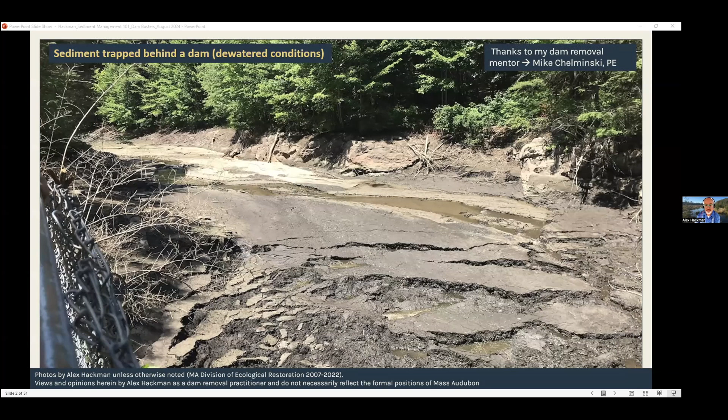So there is indeed baby poop behind dams, and it is hard to manage, but there's also this. I want to emphasize that this is also impounded sediment, fuel for the food web, habitat building substrate. How we manage that during a dam removal project affects the success of what we're really trying to do here, which is ecological restoration.

It's the process of assisting the recovery of a damaged, degraded, or destroyed ecosystem. And if you haven't read the International Principles and Standards of SER, I strongly encourage you to do that.

Our rivers, make no mistake, are degraded. Damage is an acute short-term impact. Degraded is a severe long-term impact. And that's the situation with our rivers. Thousands of dams, hundreds of years, severely degraded.

So we need to tailor our responses to the nature of the impact. To me, assisting in recovery really means three things. The first is taking a process-based approach, trying to take actions that repair the engine of nature, let nature take care of itself. The second is focusing on connectivity, taking actions that allow energy, materials, and organisms to move freely around the landscape. That's really key to how the engine of nature functions.

And lastly, engaging people for their wisdom and long-term care. In this day and age, I particularly want to call out partnering with local tribes to draw upon ancient wisdom as we seek better ways of caring for our land moving forward.

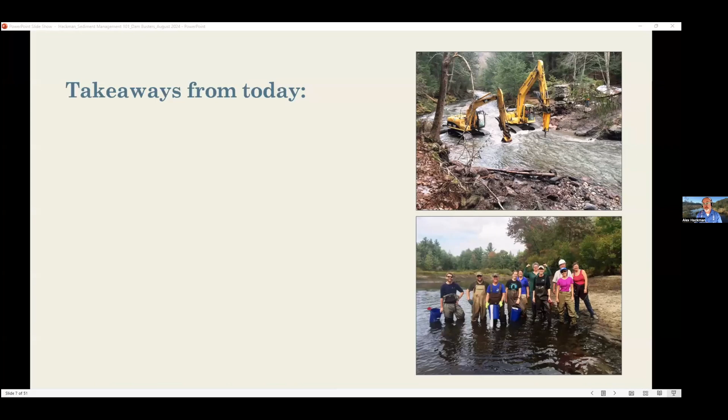But today we're going to talk about sediment and dam removals. So I have four takeaways for you. First is remove dams to restore rivers, which you already know. Number two, keep sediment in rivers whenever possible to do even more restoration. Number three, only use costly dredging and disposal when you identify significant risks. And fourth, evaluate local conditions to decide.

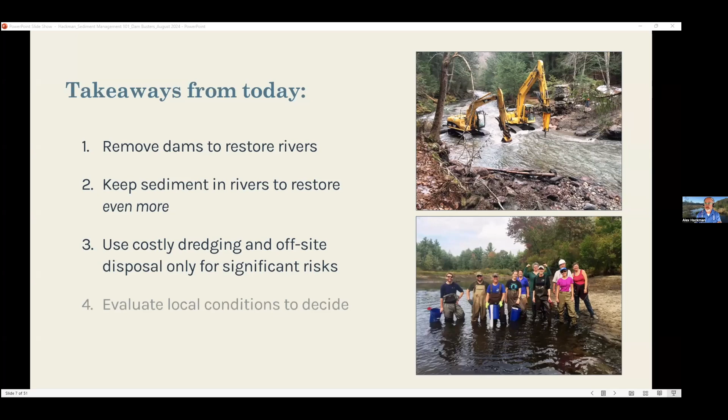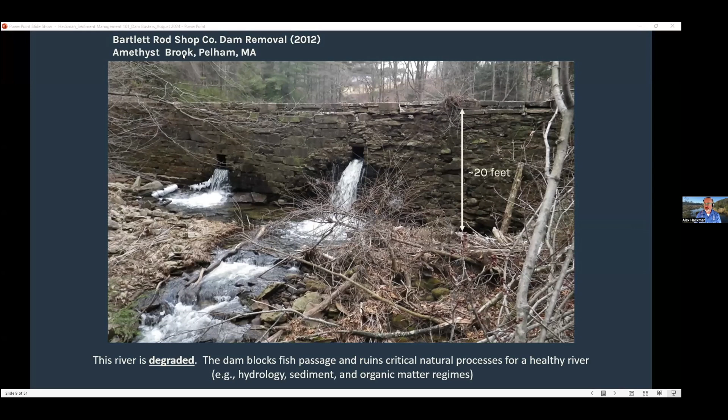So let's talk about the first one, remove dams to restore rivers. Let's talk about what a dam removal project looks like. This is a project I got to work on at Amethyst Brook in Pelham. This is a 20-foot tall dam. As you're all aware, this dam obviously blocks fish passage, but also those critical processes that keep a river healthy, namely the natural movement of water, sediment, and wood, which is how a river builds habitat on its own. That's looking upstream. Here's looking downstream.

So let's think about this. For 150 years, that 20-foot high structure has trapped all this sediment and wood, all that habitat building material trapped. This is a single point of 3,000 to 5,000 we have around the state, causing severe impairment. I want to note a lot of this talk about sediment management is about how to navigate regulatory systems, how to move preferred alternatives through them. I just want to level set and say this is allowed to happen through our existing regulatory structure.

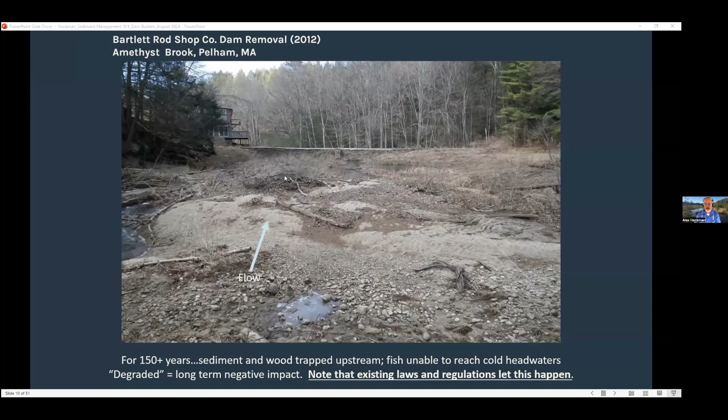Go forward with confidence with what you're doing. You're removing dams and undoing over a century of impacts.

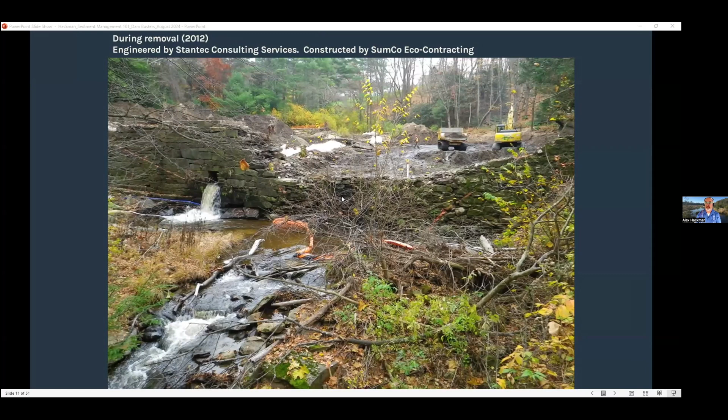This is what removing a structure like this looks like. You divert the water, get in there with large equipment, take it apart in a safe, controlled manner, and you'll have a final product. It looks like this when you're done.

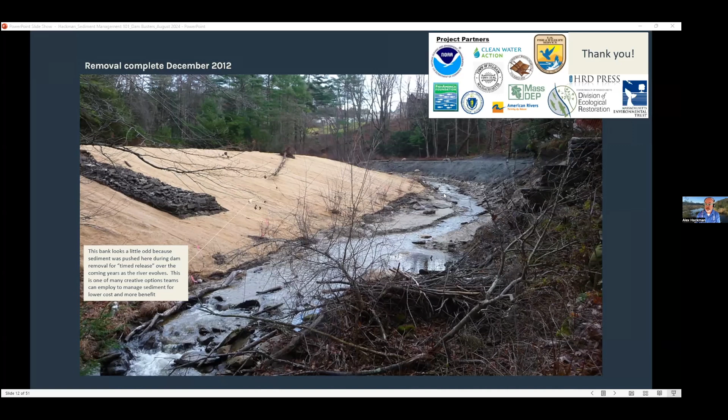This is how our dam removals go these days, right? We have a lot of challenges to remove these structures. And then just 2 years later, it looks like this. Looks like nothing ever happened, you know?

I think you all see this time and time again. You get these benefits, and the findings are documented locally, nationally, internationally. So removing dams restores rivers. Now this is at the dam.

Let's look downstream of the dam. I want to thank dear friend Robin McEwen, one of the consultants on this project, for taking this amazing photo sequence I want to share with you. So we're thinking about sediment.

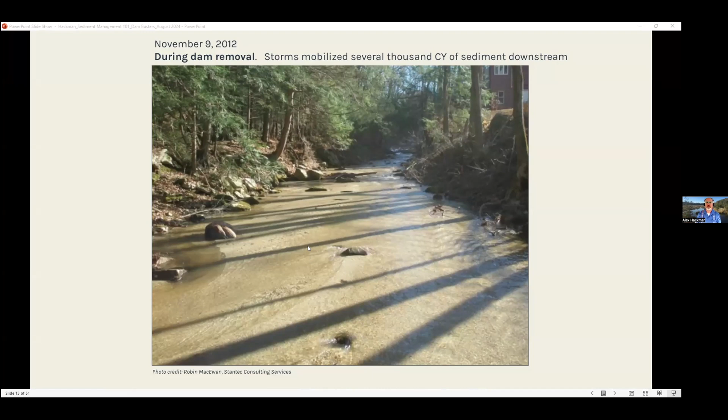But what we were able to observe is a month later transitioning to this. Just a month later, we see new floodplain benches. We see the river sorting that material, washing the fines down, leaving gravel behind. We're starting to aggrade this incised channel. Within a month, the river's converting those short-term impacts to benefits.

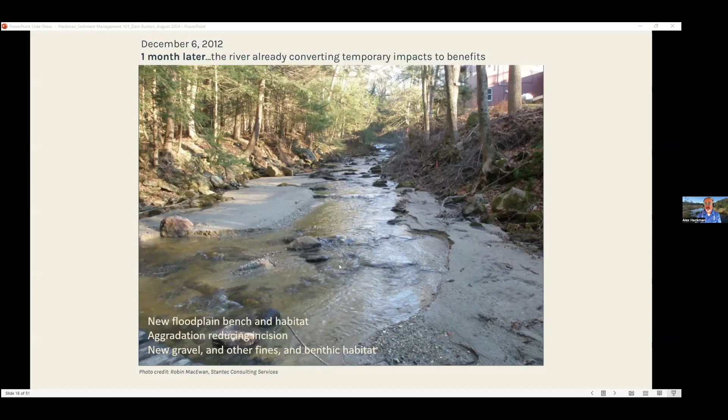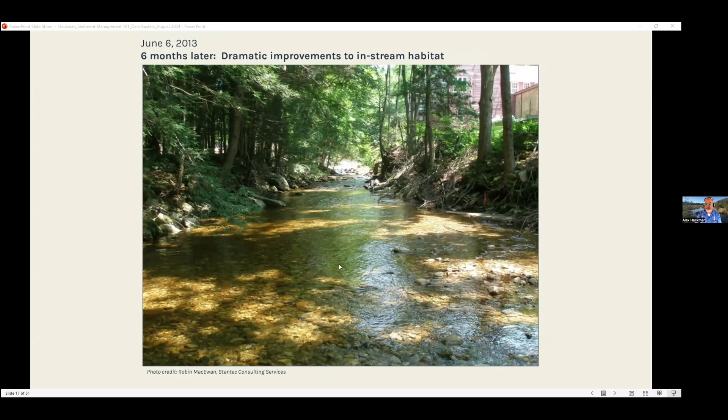Then 6 months later, when the dam removal is done, we have this situation: dramatic improvements to stream habitat, none of that visual impact remaining. This is really a theme of this talk today: you're going to have these short-term impacts doing dam removals, but you're going to yield permanent, well-understood benefits that address what could be a century of degradation.

Moreover, what happened here is allowable and permittable under existing regulations.

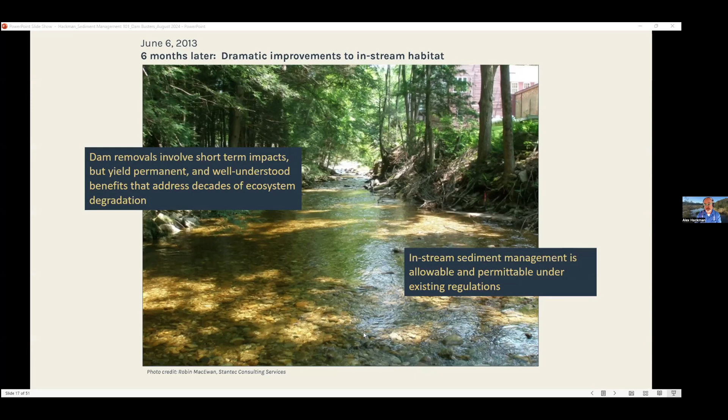That day Robin took this picture, she looked down in the stream and saw this: sea lamprey. This stream had no sea lamprey in it for decades before the dam removal. We know this because there's a sea lamprey scholar who lives in this watershed. So immediately after this dam removal, sea lamprey returned for the first time in decades.

This is how sediment release during dam removal can do more restoration. It can drive downstream habitat restoration as well. Those findings were published in a paper you can download and read at your leisure. So this is one of my big takeaways for you today: releasing what I'm going to call non-risky sediment during dam removals can significantly restore those downstream habitats as well, within months.

I want to pose this question to you: how else could you get these benefits? Let's say we wanted to concoct a project for stream bottom restoration with the purpose of returning sea lamprey to a beautiful stream like this. How would you do that, and how much would it cost? But here, as a side benefit of dam removal, we got that to happen.

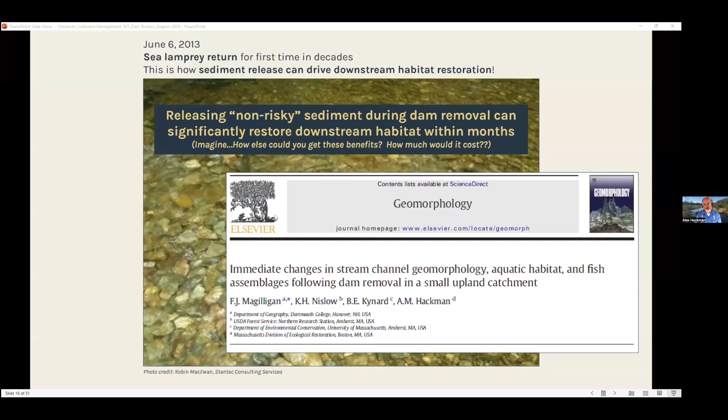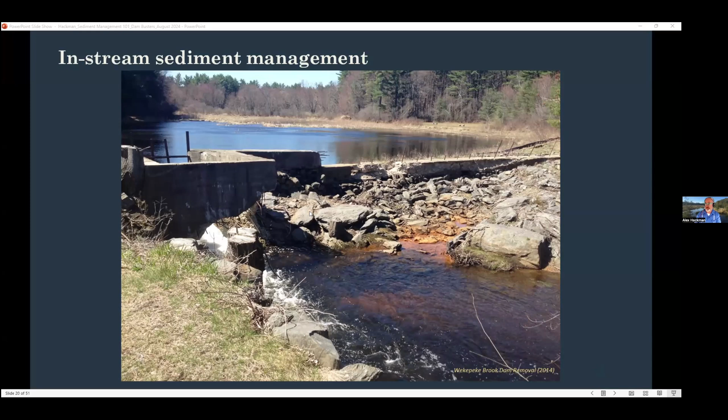So this brings us to point 2: keep sediment in rivers to restore even more. This approach is commonly called in-stream sediment management, downstream release. It's got a variety of terms, but it looks like this. This is what most of our dams in Massachusetts look like, these small structures, right?

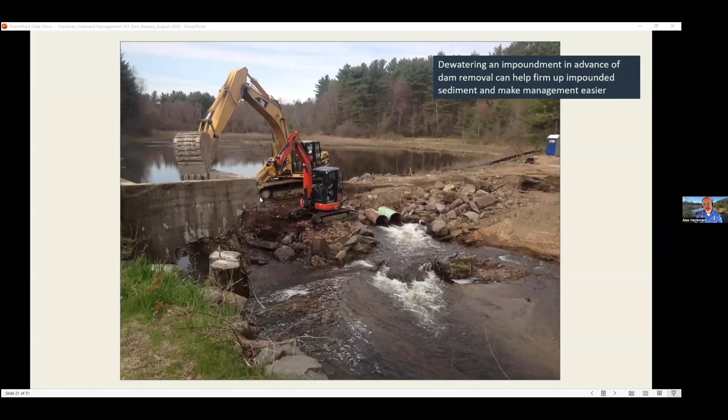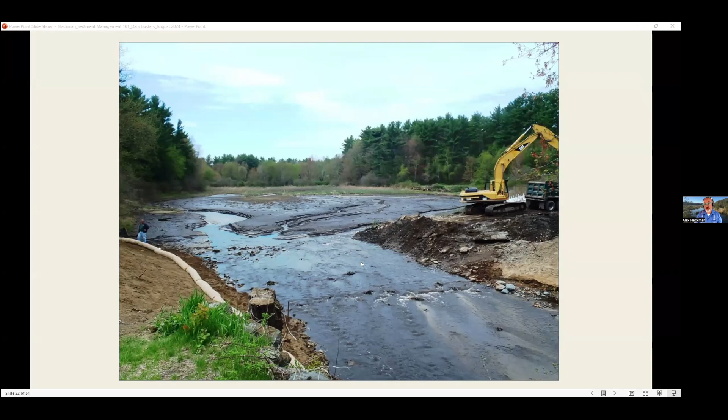So we get in there. If you can dewater the impoundment beforehand, that helps stabilize the sediments a bit. Generally this takes a couple days to a couple weeks. Then in this situation, the river was allowed to reform itself. This is completely passive sediment management. Within 3 months, all of that sediment was stabilized by just the native seed that was in the impoundment.

So for no cost, with downstream benefit, no risk, and vibrant restoration, this approach was successful.

But it's not always that simple. It's not always a situation where there are no risks, there's little sediment. Sometimes you have to be more creative.

I want to share a little bit about a project in Northampton on the Upper Roberts Meadow Brook. This is a huge dam, 40 feet tall, impounding tens of thousands of cubic yards of sediment. And this is a small trout stream. So the initial idea of what to do here was to mechanically dredge the material, truck it to a disposal location that would be created in the woods, and construct the channel through the impoundment.

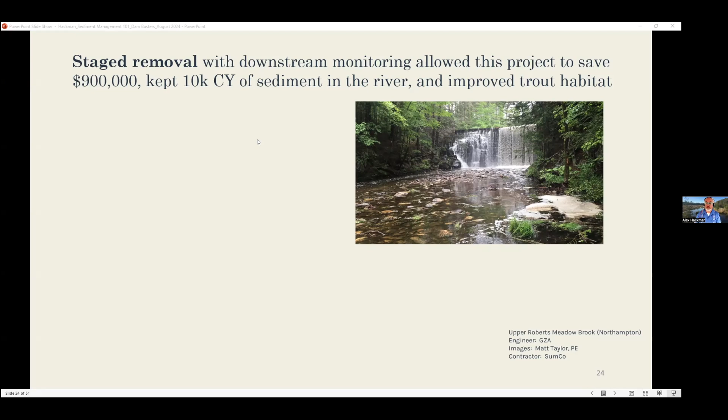When the team expanded and we thought a little bit harder about what could happen here in light of potential downstream habitat restoration benefits, a different idea was developed involving staged removal. I have to give a lot of credit to the engineer here, Matt Taylor, for this. The idea was, yeah, it would be great to release all of this sediment to benefit this trout stream, but there's a lot of it, and this stream is really small. And P.S., there's a downstream flooding risk — there's a road that already floods during storm events.

So what was developed was an approach of removing a little bit at a time. Take the first bit off and do intensive downstream monitoring to trigger the next bit of release. Remove a bunch, remove a bit, look downstream — is everything fine? Okay, remove the next lift. Is everything fine? Remove the next until you got to the end of the dam. In that way, we're able to monitor for risks, do the dam removal a little more slowly, but save almost $1 million of sediment management cost and keep all that material in the stream.

And here's what it looked like. This is why I'm going to argue strongly to all of you: make this your default approach. Make in-stream management your default approach and let your evaluation process try to prove it otherwise.

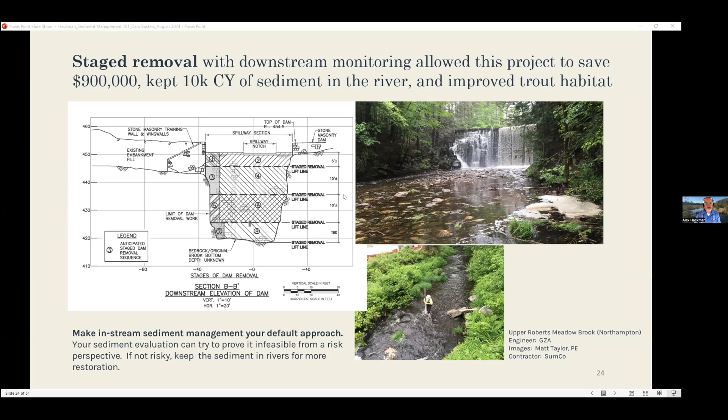This is what it looked like upstream of that 40-foot dam. Moving from picture 1, 2, 3, 4, you can see this is just gradual channel evolution. This is no channel construction. This is just go ahead, river, take the sediment and form yourself.

Some folks will look at those stream banks and say that doesn't look good, that you should get in there and stabilize that, or it just doesn't look right. Well, from my perspective, this looks great. You just have to have a perspective of giving nature time to heal. There's no need to do anything else here. Let nature find its equilibrium, let it continue to drop that material into the stream for more restoration, as we're talking about. And if you do need to stabilize this, generally it's going to be to protect infrastructure. That's an important part of your sediment evaluation that we're going to keep talking about.

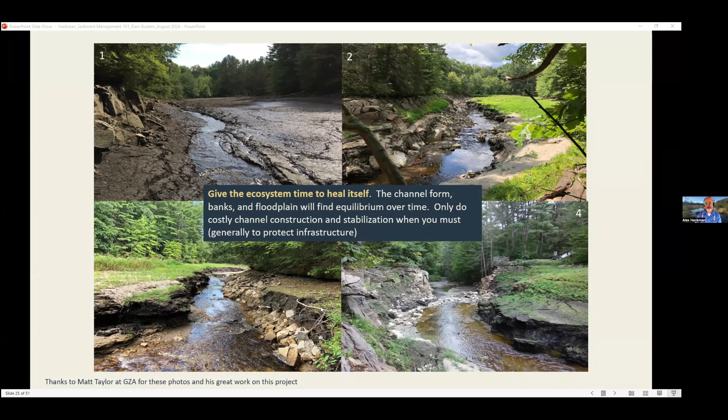Okay, so use in-stream sediment management whenever you can. Third takeaway from today: use costly dredging disposal only for significant risks. What are significant risks? Well, in some places it's obvious.

You're going to come across sediment, particularly in urban areas where it looks like this, where number one, it's just an incredible solid waste problem — you could never consider letting this material go downstream. You cause a solid waste problem and public safety hazard from metal. You also are going to encounter sheens, strong petroleum odors, and then for a place like this, you're going to confirm through sampling and laboratory analysis this is full of significant levels of pollution.

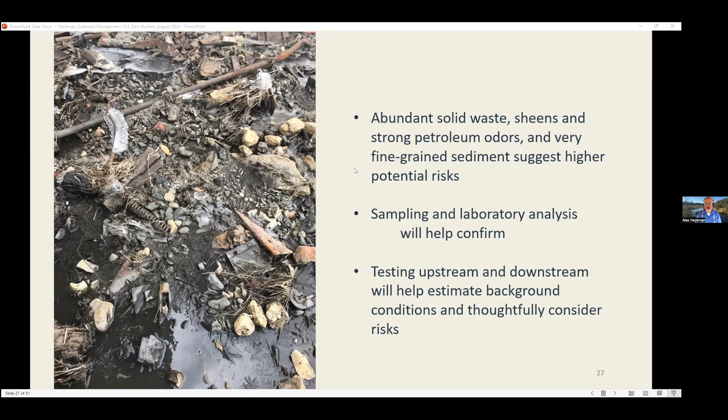Important, though, is going to be to also test the sediment upstream and downstream. You have to estimate local background conditions. You can't consider risks from pollution in a vacuum. But certainly on the face of it, this looks like a place where, yeah, you might need to do that costly dredging disposal. And this is what that looks like.

Here are two examples, one from a project in Taunton, another from a project in Pittsfield. Extremely expensive — this is full channel construction, bank stabilization, floodplain grading and planting, offsite trucking and disposal of every scoop of dirt you take out of here. In the Taunton case, they were able to reuse some of that on site. In the Pittsfield case, that was trucked out of state. So you're looking at $100 to $200 a cubic yard, and you're going to add millions and millions of dollars to projects and have substantial impacts and not get those benefits downstream.

So this is reserved for significant risks: pollution is much higher than background condition, solid waste creates a hazard, the floodplain is too risky for people to come in contact with, or you're going to destabilize infrastructure.

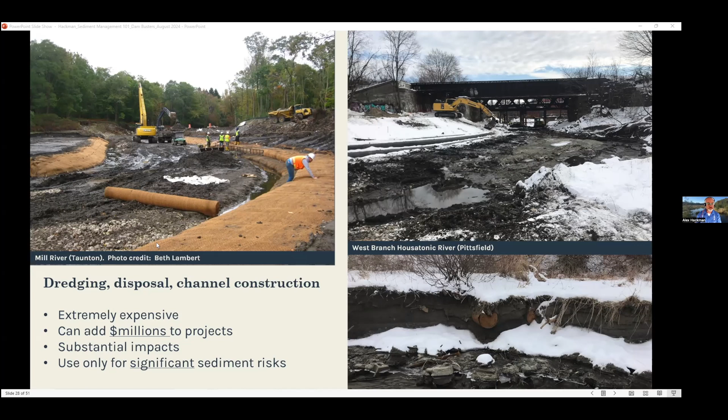So those are your choices. How do you decide? You're going to evaluate local conditions. You have to think locally about sediment management.

It's challenging because right now we have no formal guidance. The regulations don't tell you exactly how to do this, they offer some clues for things you should do. You can't draw upon another state or federal guidance document that's a perfect fit. There are good ones - the New Hampshire guidance document's pretty good, and the U.S. Bureau of Reclamation guide is pretty good, but they're just not perfect for our setting. We're densely developed, and our background pollutant levels are high, so you really need to consider background conditions.

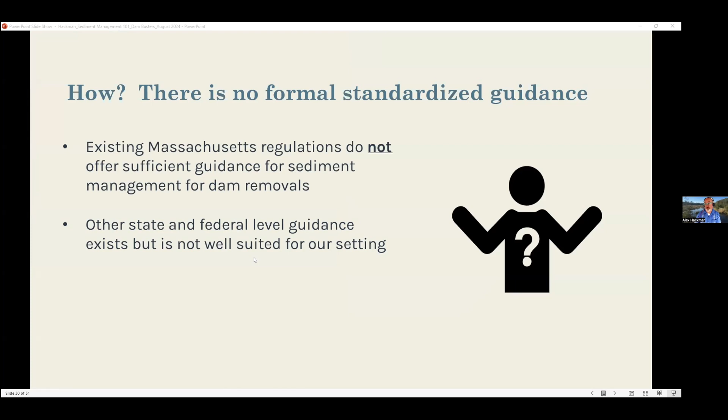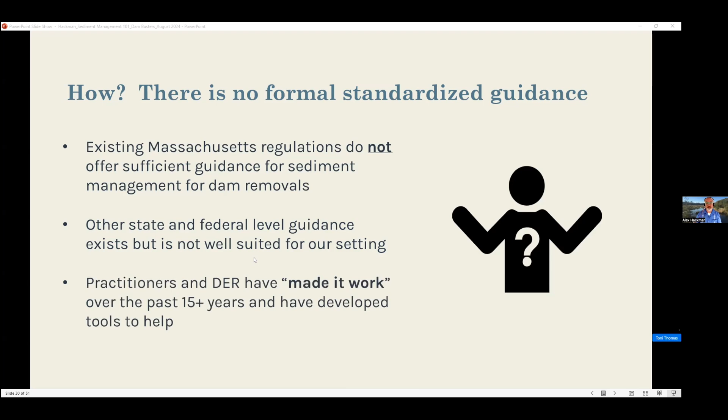So we don't have formal guidance, so what I'm going to share with you is this story. We've kind of made it work as practitioners here over the last 15 years, and we've developed some tools to help you answer that question of what to do, and I'm going to share some of that.

At a high level, this is not a training. We would need 8 hours to go through in detail everything you need to do, so I'm going to go through it in very high order. At the back of this deck, I'm including a 4-step recipe for doing this with more detail, but we're not going to get into that today. So when you download this PowerPoint deck later, there's more information at the end.

So you need to play nature detective. This is your job as a dam removal project manager and team. You need to understand the site, the setting, the watershed. So you start by looking at the stream, the valley, the watershed, the land uses, upstream land uses, surrounding land uses. All speak to the potential for pollution, which is called a due diligence analysis, which you use to inform how you sample, what you sample for.

You then do that work of taking sediment samples, assessing the characteristics of the sediment, because that makes a big deal too for mobility. And you do laboratory analysis of pollutants of interest. Critically, you collect background sediment information, upstream, downstream, and you compare pollutant findings from the impoundment to that local context, to that local background condition.

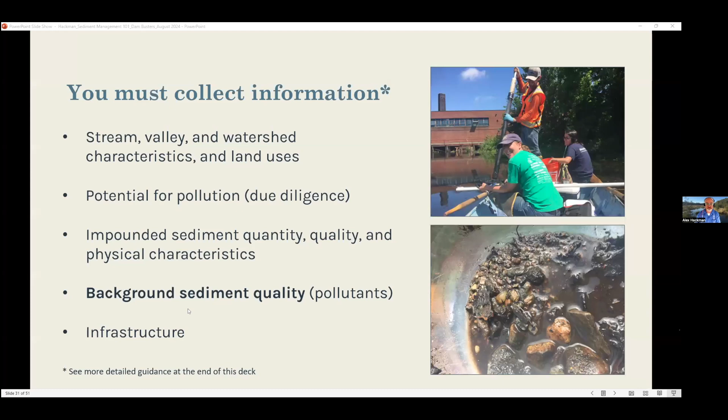There's nothing around the dam. So there are no residences, there are no daycare facilities, there's no parks. There's no land uses that would cause concern about potential exposure of pollutants in that sediment.

You and your engineers will get into this impoundment. You will measure the total volume of sediment that's there. You will take samples, you will probe for refusal, you'll take physical characteristic samples. You'll examine the dam to see...

...what is there about the dam that can help you here? Is there a low-level outlet that you can use to drain the impoundment early? If not, can you notch it to dewater it early? All these kind of things.

And beyond understanding the total volume of sediment behind this dam, you need to estimate something called the mobile volume of sediment - how much sediment is going to erode and evacuate and move downstream as the channel underneath this impoundment reforms. So let's fast forward after the dam removal to show you what that looks like.

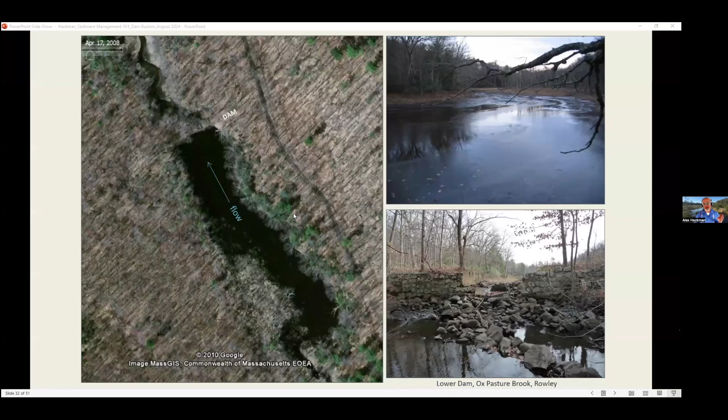So here is the full impoundment. Fast forward to after the dam removal. This is what the mobile volume of sediment looks like. It's this thin ribbon where the river evacuated the sediment and the channel, the river was reborn again.

So the mobile sediment is the volume of material to consider for ecological risks downstream. If you mobilize pollutants in this area to downstream areas that are higher than background levels and above risk thresholds, you could impact downstream biota.

You also need to consider exposure in the floodplain. So the mobile sediment scooted and went downstream. The rest of that impounded sediment firmed up in place as the new floodplain.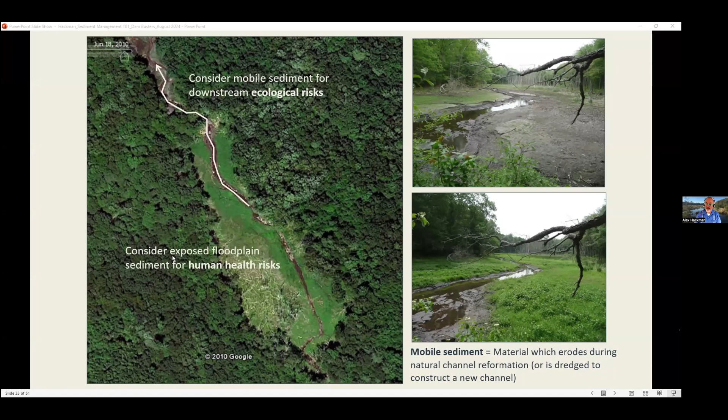Well, if you had residences and daycare facilities and places where children could eat soil, frankly, or where you could come into contact with the soil, you have higher risks. But if you don't have those things around, it's a different risk scenario. So there's outstanding guidance in Massachusetts for human health risk exposure from something called the Massachusetts Contingency Plan.

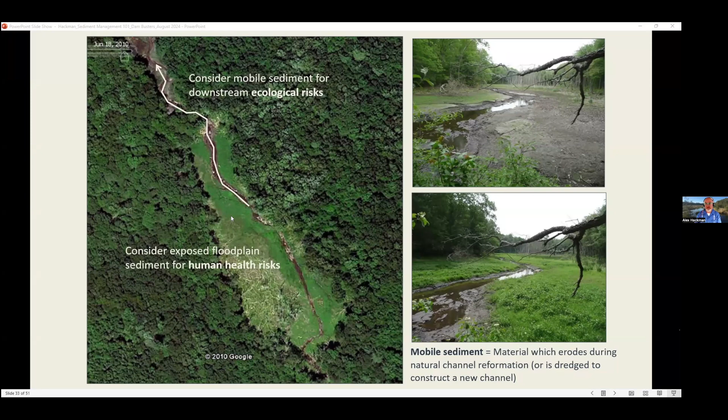Not at this site, but then the other dimension you need to look at is the infrastructure risks I talked about - downstream pollutant risks to ecology, new impoundment, new floodplain risks for human contact. At a site like this, when you remove this dam where sediment's impounded behind, what about this railroad bridge right behind? Might that movement of sediment destabilize this railroad bridge? What about the sewer line running up river left here, or that crosses the river upstream? We don't talk often about infrastructure risks with sediment, but this is just as important as the pollutant risks.

And sometimes this drives your management approach. You just can't let the river move sediment naturally because you need to do it in a more controlled way, because you're going to destabilize sediment infrastructure. This is done by a project engineer. This is obviously a very high risk setting.

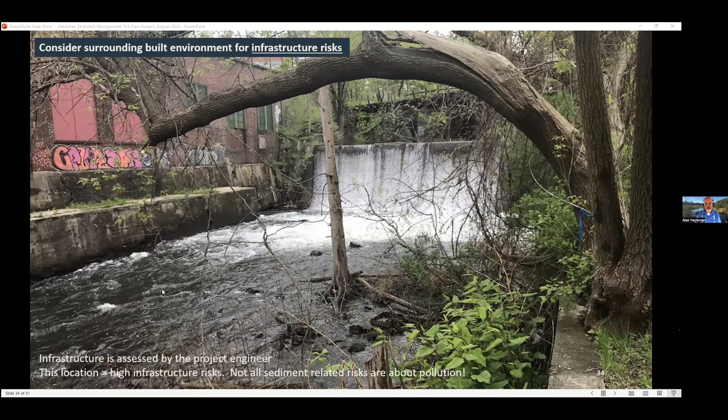Okay, now you've collected that information, you need to think about how risky things are. So before I give you the punchline on that, I just want to zoom out and ask you to always ask this question. We're talking about managing typically a small volume of sediment behind a dam and making decisions about letting it go downstream or dredging it. So relative to what, right?

This cannot be considered in a vacuum. Remember that the dam in place is a known risk for the river. So you're removing this thing that's been in place and is impacting the river in a known way. So you have to consider that your potential sediment management is a short-term, likely small risk relative to what's already happening with the dam in place.

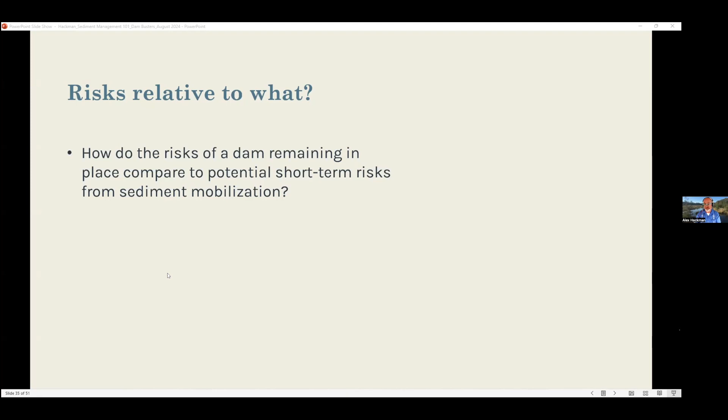Secondly, I want you to think about the fact that sediment is always moving into a river. It just rained in my neighborhood here in Medford, Massachusetts. I walked around and I see sediment all over the street, running into storm drains, going down the block and into the Mystic River. Sediment is always entering our rivers, polluted from yard runoff, from road runoff. Here's an example - this is a pile of road sand and salt under a storm drain up in Vermont. Every storm event, we're loading sediment into a river. So it's dynamic - what you're doing is not the only input of sediment in a river.

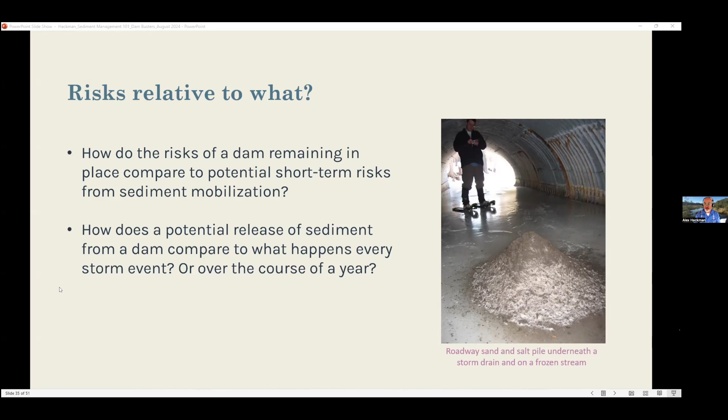So let's get real. Here's the punchline. You've collected this information, and you need to decide three things to make your decision about whether you can manage your sediment in stream or you need to do that costly dredging.

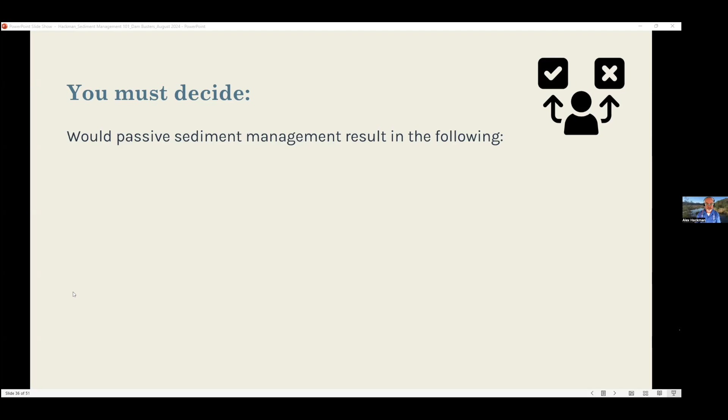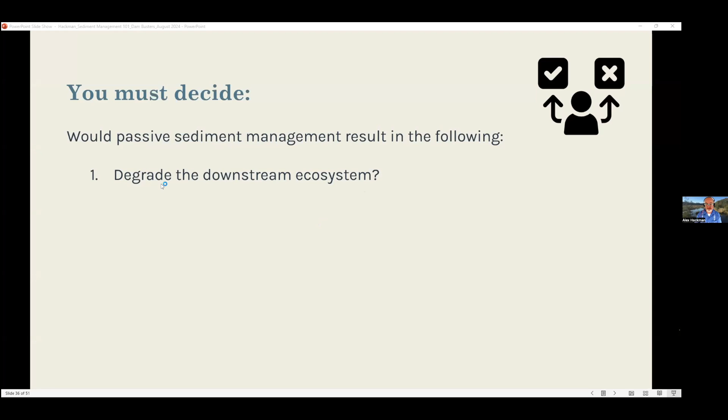One: are you going to degrade the downstream ecosystem? Are you going to release pollution that is significantly toxic - that includes persistent bioaccumulative toxins or significant elevations of petroleum hydrocarbons? That's a challenging question to answer, and there's some guidance at the end of this. Typically my recommendation is you compare your findings in the impoundment to published thresholds as well as background conditions. So question one: are you going to significantly degrade the downstream ecosystem?

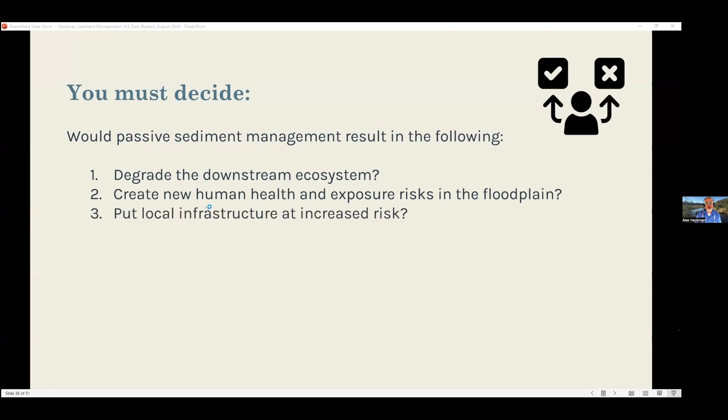Secondly, are you going to create new health hazards in the floodplain? That has to do with exposure scenarios - if there are sensitive receptors right around with high frequency and intensity of uses. That's also not something you can look at in a vacuum. And thirdly, are you going to put local infrastructure at risk if you release sediment? So those are your three questions.

If no to all those things, passive sediment management is your default approach. And remember those benefits we talked about.

If maybe, you can try to mitigate and develop hybrid approaches. You can do things like push some of the sediment off to the side for timed release, excavate some of the sediment if you can identify a hot spot to reduce the overall mass of pollution, remove the dam in stages with monitoring to determine downstream impacts if it's sensitive. There are so many creative combinations of things you can do to allow you to keep at least partial in-stream sediment management as an option.

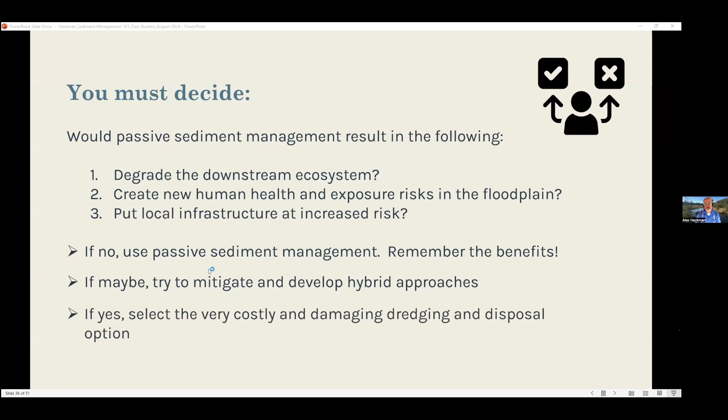And then your last option, if you have significant risks, is to activate that very costly and, I'd say, damaging dredging and disposal option.

So these are hard questions. You will need these things to help you make these decisions. You will need experts to call on. You will need knowledgeable consultants and contractors, and I see many of them on this call today. You will need tools.

The state has a sediment quality evaluation spreadsheet that will help you put together your findings, including from the impoundment and the upstream and downstream areas, into comparisons with recommended thresholds for ecological impacts as well as human health contact impacts.

And then you're going to need much more in-depth training. As I said at the start, to go through this in great detail is about an 8-hour training. So my hope is you walk away with high level knowledge today, but more training is going to be required.

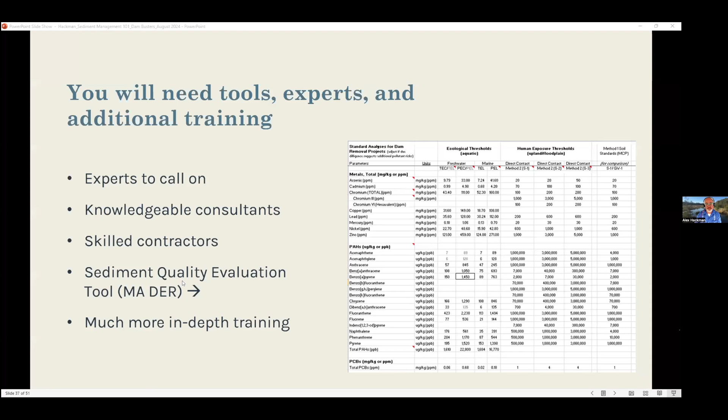So you will need these things. Then there are things that we all need to do these projects better. As I come to my conclusion here, I just want to itemize some of these systems change issues that we all need to address to do this work more. The first is, in my view, setting higher expectations.

We are getting comfortable with removing 3 or 5 or 6 dam removals a year. I would like to assert to you all practitioners that we can do better and we can do 1 a week. I'd like to see us do 50 a year. Then in 25 years, we can make a real impact for our rivers. We could remove half of our dams. We could remove 1,250 dams in 25 years. So I think we can raise our expectations.

The second thing we need to do is work with the state to complete this guidance document. This is sitting in draft form. It is a state-of-the-art document that would provide an extremely thorough, vetted roadmap for all the details of this process I just described. So I'd like to call on partners and DER to work together to find a way to finalize this.

The third thing we need at system level is revamped regulations. We're currently in a wave in Massachusetts of tinkering with our existing regulations to try to make restoration easier. I don't see that being productive. We need to move much faster. So we're starting in my organization to talk about a 3-in-3 proposal, which is 3 steps in 3 months: single application, coordinated review, joint issuance, or presumptive approval. And that's, I think, the kind of change we need to really accelerate restoration in Massachusetts.

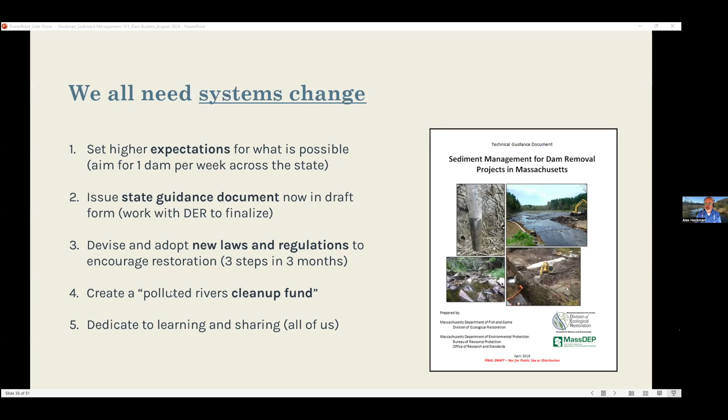And then with all of you who've tuned in today and are watching this webinar series, I would say let's dedicate to learn and share together our lessons, what's working, what's not. So if there's any way, any forum for ongoing sharing could emerge from this, I think that would be a great outcome.

So again, takeaways from today. My colleague Carly and my friend Dan kind of say it all here. The dams need to go away and streams need sediment. So keep the sediment in the rivers if you can. Use that costly dredging option only for those very significant risks. It's very expensive and damaging. And then make sure you're evaluating your local conditions to decide. Do not consider risks in a vacuum.

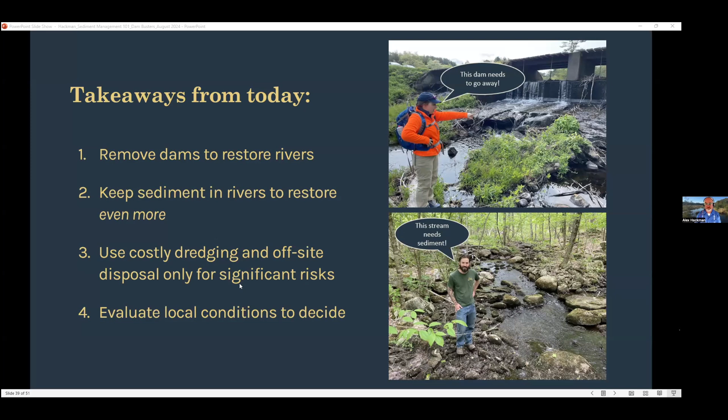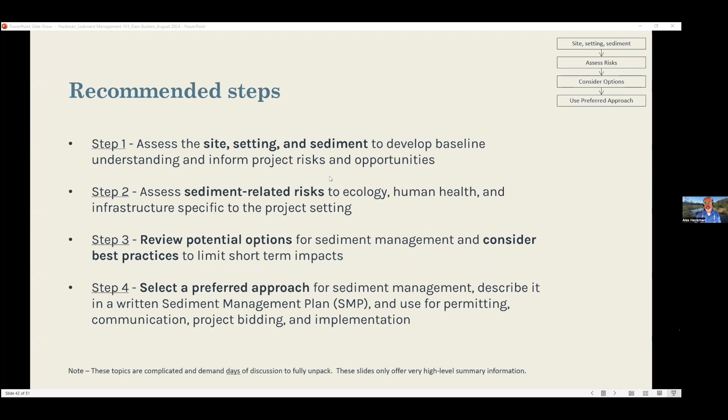So with that, I'm going to end. I will flip forward just a couple slides just to show you there are extras after my talk, which get into four recommended steps of looking at projects. But we're not going to get into this because I need to leave time for questions. So I am going to stop there. Thank you.